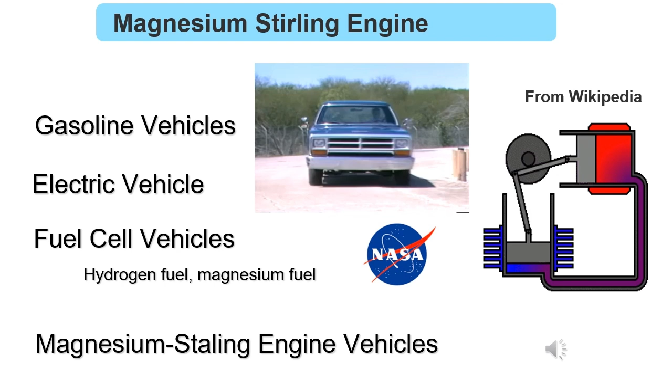The Stirling engine was invented in 1816 by Robert Stirling, a Scottish minister. As a heat engine, it is theoretically predicted to have the highest thermal efficiency. The efficiency is calculated as 1 minus the low temperature part divided by the high temperature part.

If the absolute temperature of the low temperature part is 293 degrees, 20 degrees Celsius, and the absolute temperature of the hot part is 1273 degrees, 1000 degrees Celsius, the efficiency is 77%. This is a very large efficiency compared to 30 to 40% for gasoline cars.

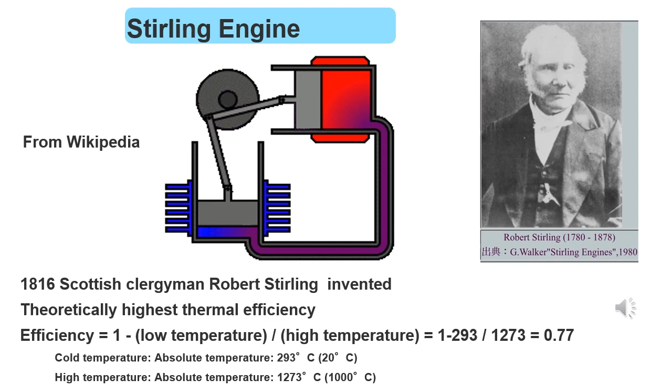The history of the development of the Stirling engine is old. Philips produced half a kilowatt around 1950 and 120 kilowatts around 1972. In the US, the P75 achieved 65 kilowatts in 1975, and in Japan, Aisin Corporation achieved 52 kilowatts in 1978.

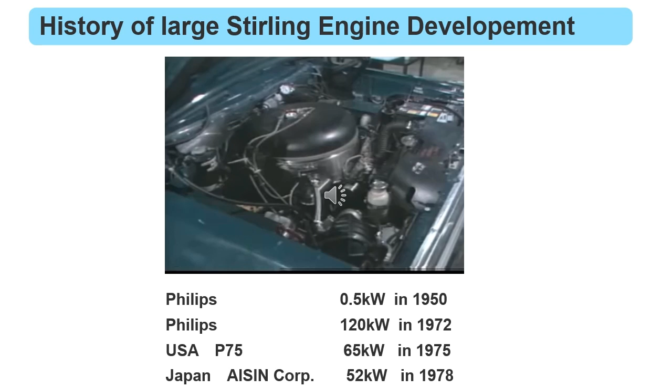In the United States, NASA is conducting a number of experiments with cars using a 75 horsepower, 56 kilowatt Stirling engine. Over the course of 1 year, they conducted a long-term driving test of 9,000 miles, 14,000 kilometers, and determined that there was no problem.

However, in this case, fossil fuels are used to heat it. This was announced in 1992, but a YouTube video was published in 2012.

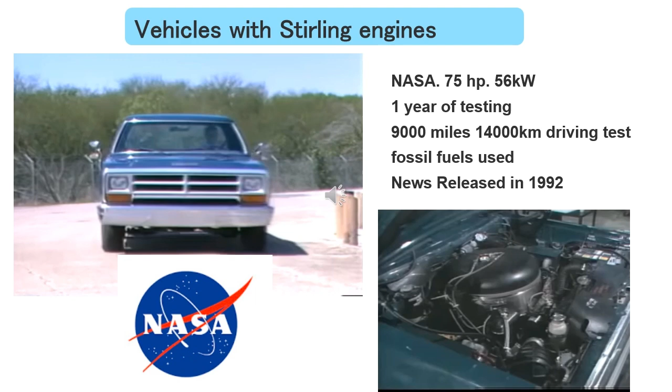The heating source can be solar heat, nuclear power, or anything else, and it has mainly attracted attention for space use. Since the piston motion is changed to rotational motion, it can be used either to drive the wheels like in a conventional gasoline car, or to generate electricity by turning a generator.

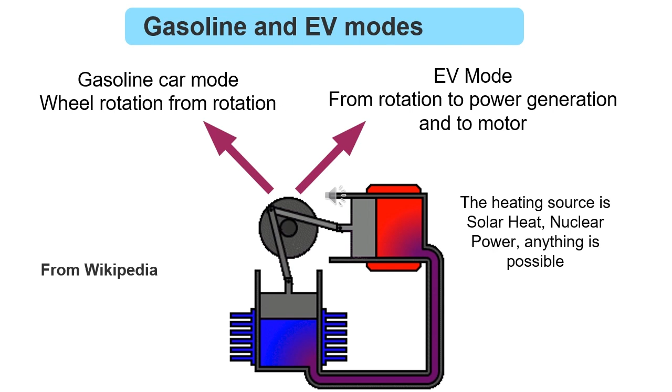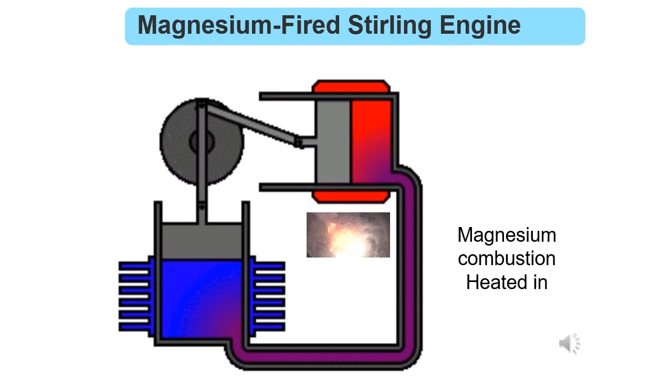Here, we propose a method in which magnesium reacts with water and burns to generate a high temperature. An experiment in which 1200 degrees Celsius was achieved by magnesium combustion was published in Applied Physics Letters, a prominent international journal of applied physics, by Yabe in 2006.

At 1200 degrees, the theoretical efficiency of the Stirling engine is 80%. On the other hand, the efficiency of a gasoline engine is 30 to 40%. This is thermal efficiency, but there are also other problems with mechanical efficiency, such as piston friction. This is not a problem for car companies, as it is a mechanism already used in gasoline vehicles.

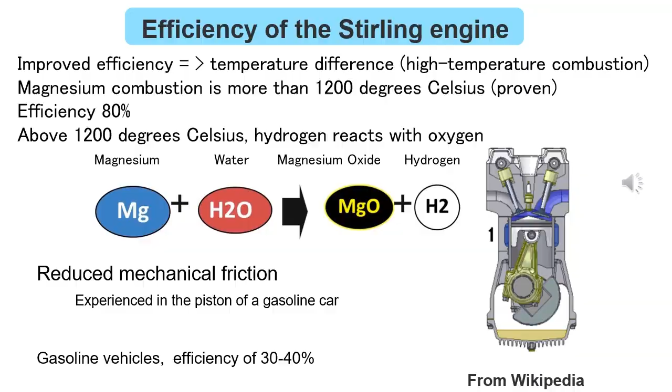Since magnesium is a solid, if used as fuel, the question is whether it can be supplied continuously. Yabe used a mixture of magnesium and water in a ratio of 1 to 2 as fuel. This is fluid, so it can be transported through a tube.

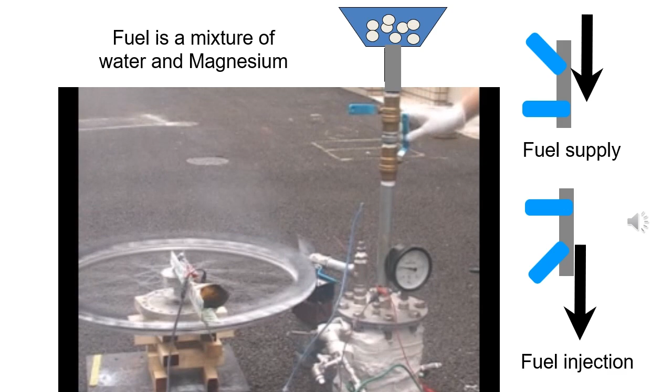Now it's just a matter of how cheaply magnesium can be produced. Seawater contains 1,800 trillion tons of magnesium, and we are proposing an efficient way to extract it.

Experiments have shown that the seawater desalination system manufactured by Yabe et al. can produce 43 liters of distilled water per 1 kilowatt-hour of thermal energy. It contains 56 grams of magnesium.

Distilled water is quite expensive, but if you sell it for 100 yen per liter, 1 kilowatt-hour will yield 4,300 yen. This energy can be obtained from anywhere, but if you simply use conventional electricity, the profit will be 430 times the price of electricity.

On the other hand, it has been proven that a 1 kilowatt-hour laser can smelt 73.8 grams of magnesium. Since the efficiency of semiconductor lasers is currently around 50%, the power required to produce 1 kilogram of magnesium is 27.1 kilowatt-hours.

It is better to use wind power, solar power, and geothermal power generation, but even if you use ordinary electricity at 10 yen per kilowatt-hour, the price of 1 kilogram of magnesium will be 271 yen, which is about the same as the current selling price of magnesium.

To get the same price as gasoline, it has to be half as cheap. That's where distilled water from seawater comes in. By combining distilled water and magnesium, the price of magnesium becomes comparable to that of gasoline due to the sale of distilled water. Of course, with the development of various technologies, it will be possible to achieve this with a laser alone.